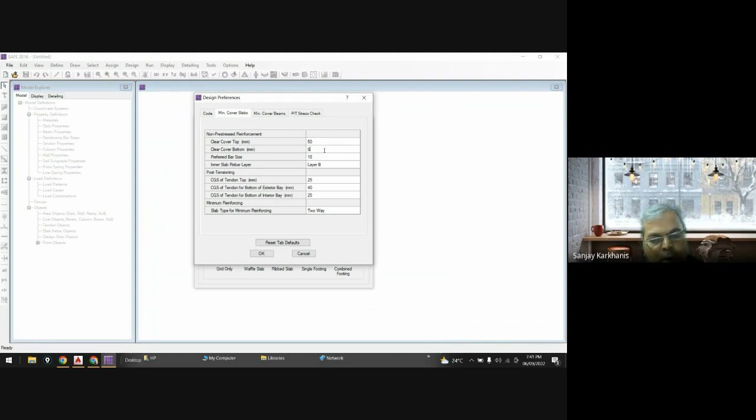Then design preferences. Then minimum cover. Now again it is for footing, so I am going for 25. No, not 25, it's 50. So 50. Then bottom cover also 50, top cover also 50. Then we are going to use the bars as 12 dia, and rest of the things are okay. Clear? Yes, sir.

Now, last time we have drawn everything from basic, but today we'll take help of this combined footing template. Click on that combined footing, and now you will get this. You have to provide this data. Now, whenever you are going for combined footing, let me discuss some points about when you will be going for combined footing. Yes, any idea?

Hello. When the distance between two foundations is very close, we use combined footing. When the distance between two columns is small and you go for design of isolated footing, you might get interference of one footing into the other, or they may be close to each other, and that's why the pressure bulb may get disturbed. So instead of going for two isolated footings, we may go for combined footing.

So the footing will be one, and from one footing there will be two columns. There could be two columns, three columns, anything. Sometimes it may be four columns also. For four columns, if they are very near to each other, we can provide a combined footing. That is the first case.

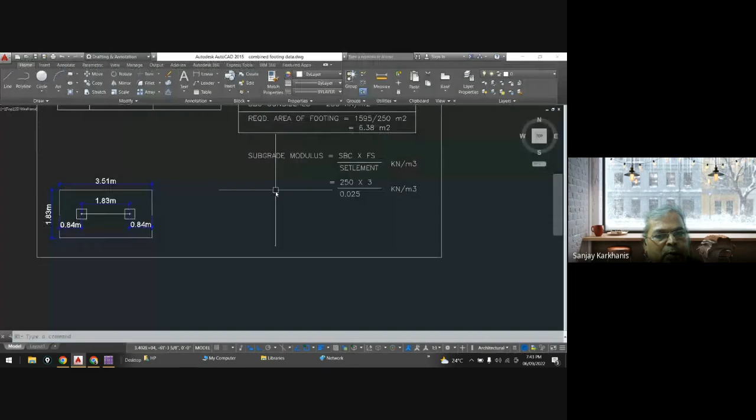So let us see one diagram. I have prepared one diagram. See, this is our criteria. I have done a little bit of work on it, and you can take a snapshot of this so that it will be available to you, or I may provide it, or you can create your own also. What I'm considering: column A is this, column B is this right side column. Both columns have a size of 15 by 15, that means 0.38 by 0.38.

Hello, am I audible? Yes, sir.

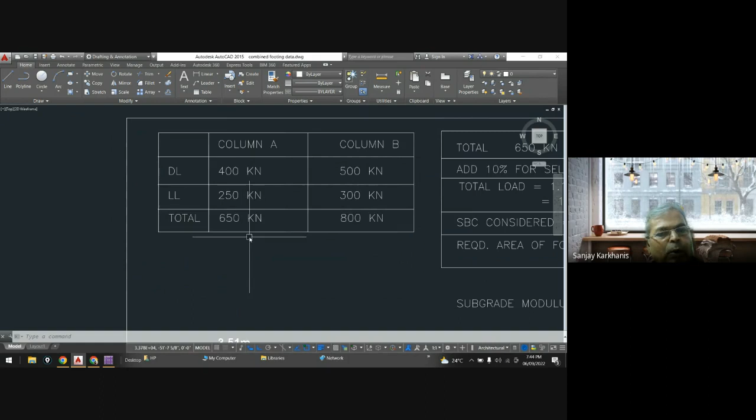Then on column A, we have a total dead load of 400 kilonewton and a total live load of 250. So together on column A we have 650 kilonewton as working load. On column B we have, say, 500 and 300, so together it is 800. Now, if you design isolated footings, you may see that the distance between the two footings is very less, so we have decided to go for this.

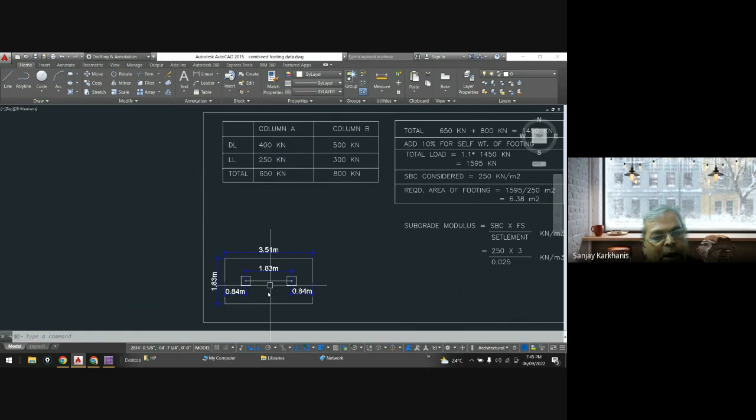Another thing is that the bearing capacity is less. As per our consultant, the soil bearing capacity to consider is only 250 kilonewton per square meter. So low bearing capacity soil is available there, and that's why you will get a large footing. Isolated footings might interfere with each other, and that's why we are going for this.

Now, basic work is carried out. Total load is 650 plus 800, which is 1450. We are adding 10% for self weight, and so the total load on the footing comes out to be 1595 kilonewton. The SBC is low, so the required area of footing will be 1595 divided by 250, which comes out to be 6.38. So 6.38 square meter area for two columns.

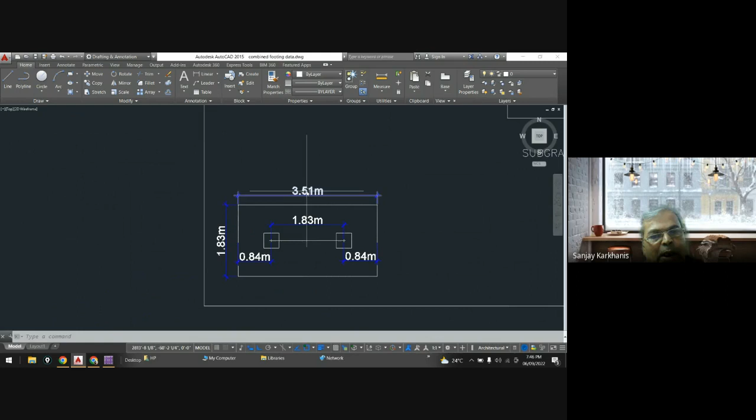So the combined footing is this. We are assuming 1.83 as width, and based on that width we are calculating 3.51. If you multiply 3.51 by 1.83, you will see that the area of footing is more than 6.38. Then subgrade modulus is also calculated here, which is nothing but SBC multiplied by factor of safety, FOS, divided by settlement.

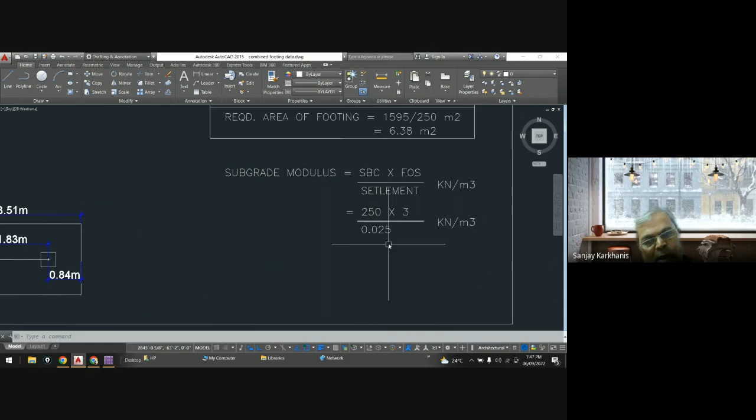Now the settlement: as this is in kilonewton per square meter, this has to be in meters. So allowable settlement of 25 mm has been converted. So 250 multiplied by 3 divided by 0.025. How much will it come out? Yes, anybody?

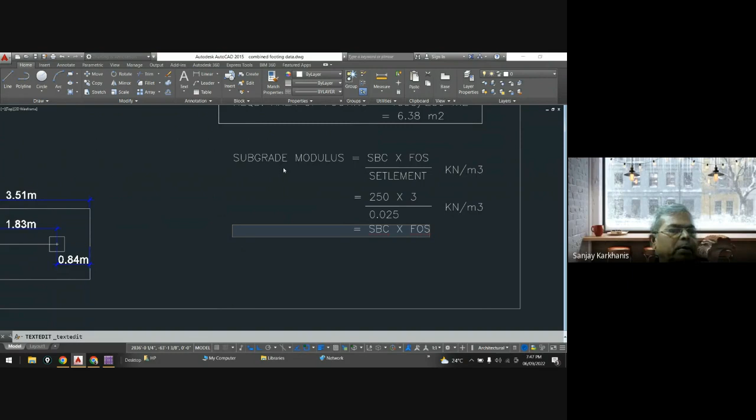Yes, how much is it? 30,000. Yes, sir. Let me calculate it: 250 multiplied by 3 divided by 0.025 is 30,000. So it is coming out to be 30,000 kilonewton per cubic meter, not per square meter. So always see that subgrade modulus is 30,000 kilonewton per cubic meter.

Okay, so this is the data that we have defined.

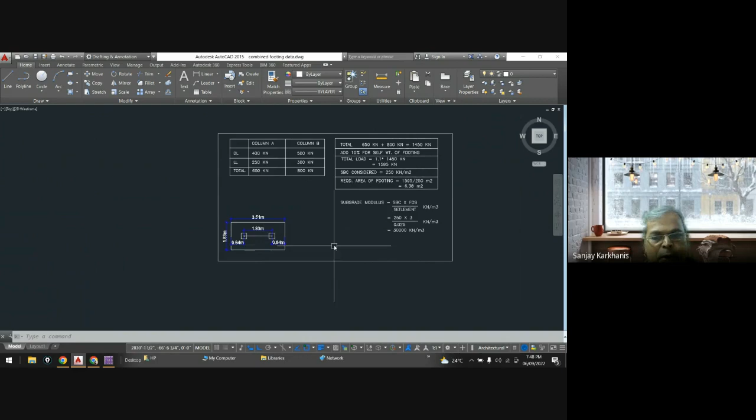This much is the preliminary data that you have to find out, so that your iterations will be less. Otherwise you can consider any dimension and go on rectifying the sizing as per that criteria. But if you work this out, you will see that the iterations are less. So now you can see here.

The architectural data shows that the columns are 1.83 meters center to center. The left edge of the footing is at 0.84 meter, and the right edge of the footing is also 0.84 meter from the right column, and the total dimension is 3.51 by 1.83. Now this is the data that you have to provide. So what is the left distance in x direction?

How much it is? 0.84, right? See here, plan dimensions along x direction, left edge distance. So I'm writing it in meters, so 0.84. Then right edge distance is also 0.84.

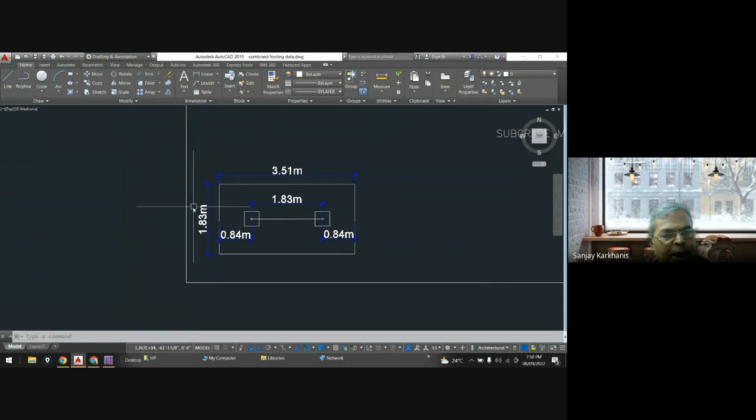And in y direction, now what is happening in y direction? Now you can see that from center, you will see that 1.83, half of that. So 1.83, you may consider this as 1.84, so that it will be more easy. So 1.84 divided by 2 will come out to be 92. So in y direction, upward 92, downward 92, right? Yes, sir. So you can see that here you will provide it as 0.92 in top edge distance. Bottom edge distance will also be 0.92.

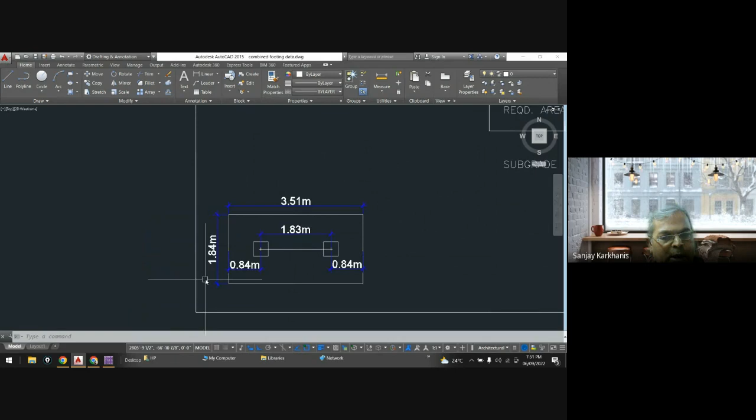Okay. Now the load spacing and sizes. Now here you have to see the geometry. So if you see that along x direction you are having 3.51, and along y direction you are having 1.84, 1.83, because your structure is like this. Let us see. It might be something like this. See, if your orientation is something like this, then accordingly x direction will be 1.84, and bottom distance will be 0.84, top distance will be 0.84, and the footing will be like this.

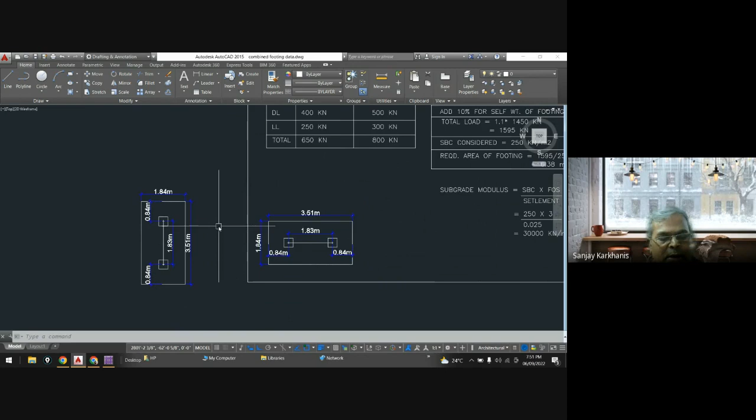So it is as per your architectural data. Okay, so right now we are considering this, and that's why here we'll see that 3.51. So center spacing in x direction is 1.83, and x dimension is 351, y dimension is 184. So you can check it here. Now, load and spacing either in x direction or in y direction. So right now we are considering it in x direction.

So spacing between the two columns is how much it is? 1.83. 1.83, right? Hello. Yes, sir. So here it will be 1.83, and the size of the column. So size of the column that we are considering as 380. So I'm considering it in mm. So I will write it as 380. Okay. Clear? This much data, how we will be entering it, I think it is clear, because there is nothing new or very difficult. So can we go ahead now about load values?

So load 1 and load 2. So this is your column A. You may consider column 1, column 2. So 400 and 250 is the dead load and live load, and 500 and 300 is the dead load and live load on column number 2. So how much is the load over here? In dead load condition, it is 400, and what is the live load? It is 250. Right? Then if Mx and My are there, you can provide that.

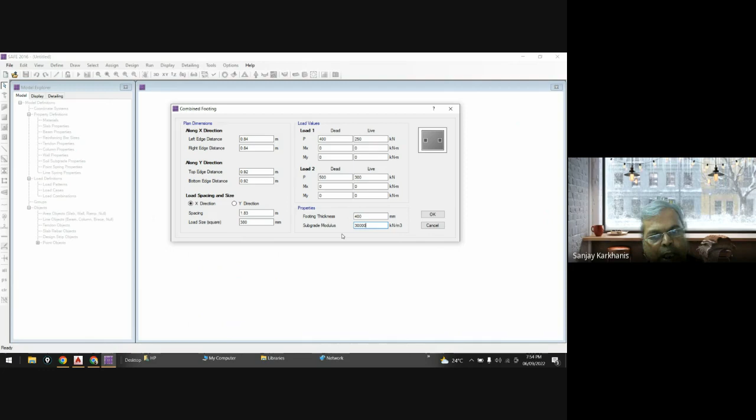And subgrade modulus. What was subgrade modulus that we have calculated? 30,000. Clear? Yes, sir. So click OK, and it will provide you the data. See here, already it has done all the things. So you don't have to mark the footing, mark the column, etc. So that is how you can use the templates. Now here, as this default template has material properties different, we have to go and check it. So let us define the material properties first.

So right now, if you right click on this, you will see assignments, geometry, loads, and design. You can see here some different things which we are not interested in. So we'll define that. Go to define, go to material. Under material, first you will go for add new material. Let us consider grade of concrete as M25, or shall I go for M20? Let us go for M25. So the material name, you can say concrete, CONC M25.

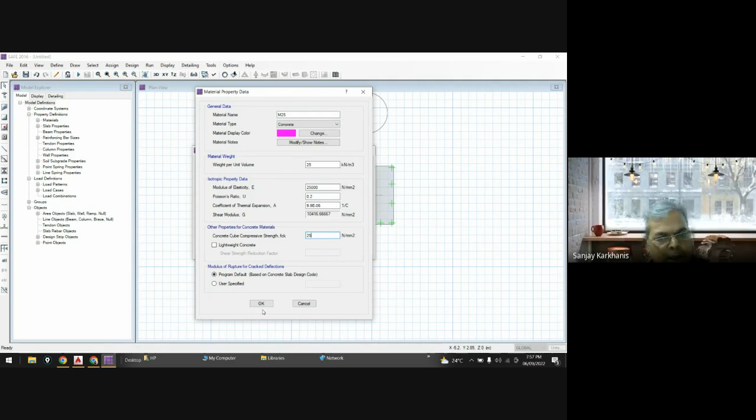So you can see multiplied by FCK. So FCK is 25, and raised to 0.5, and enter. Or you can directly calculate and provide it over there. And then what is FCK? That FCK, now we are going for 25. Clear?

So the material has been defined. Similarly, we have to define another material that is for rebar. So let's say Fe or HYSD, whatever you want to say. And now I want to use Fe 500. So I will go for rebar, and this will be 78.5 approximately, or you can say 75. Then modulus of elasticity for steel is 2 into 10 raised to 5, so 200,000.

Okay, then Fy will be 500, and this Fu, 485. No, that is for 415. For this, it is 545. But actually, it is not used. You can provide 500 also, because we are not using this minimum tensile stress in any calculation. Okay. So this way, we have defined material.

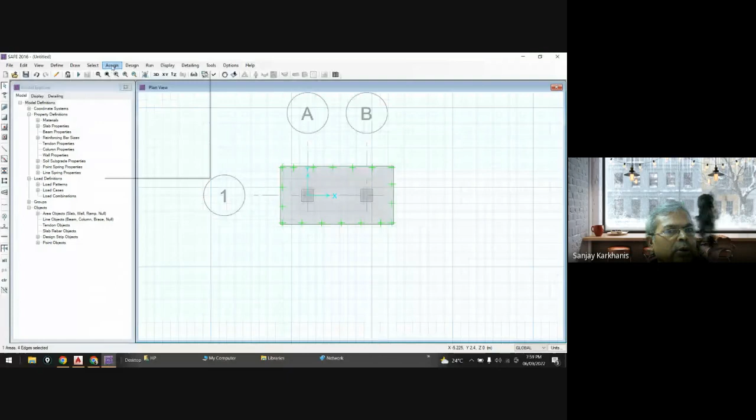Similarly, we have to define what we will have to define. No, the material, only material that we have to define. And now you can select and assign support data, soil properties. So the soil property, okay, we will have to define the soil property also. But yeah, he has considered load combination. Okay, but let me go for that first.

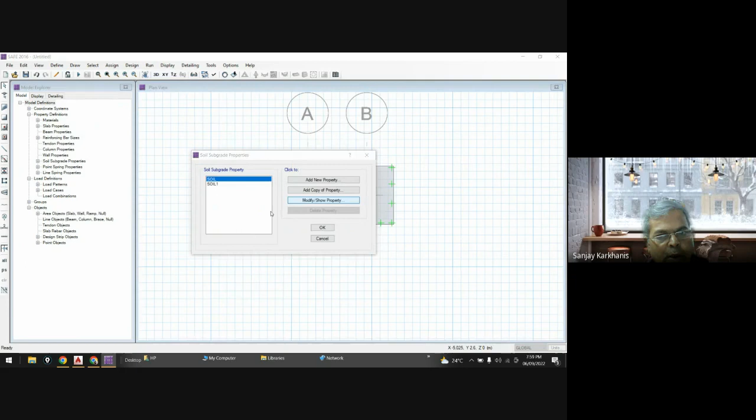If I go for this, soil property is soil, and let me see what is the property that he has considered for soil. So where it is, that soil subgrade properties, soil, yeah, see here, so the soil has been already assigned, and that property has been assigned, so you can go ahead straight away. So after that, we will have to see the design preferences also. So yes, design preferences are clear. This is also clear. So it has been assigned.

So we'll go for load pattern. Load pattern is also there. Load combination. So in load combination, you will add new load combination. So combination one will consist of dead load and live load with factor equal to 1, and service normal will be highlighted.

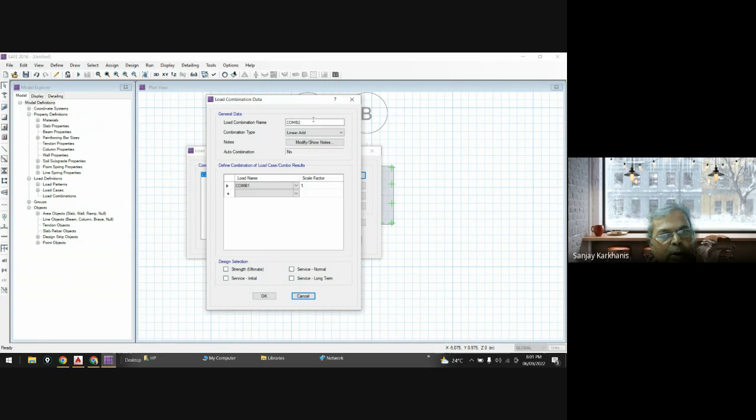Then another combination will be combination 2, where you will have dead load equal to 1.5 and live load equal to 1.5. Okay. And consider strength. Click OK. Okay, the combinations have also been defined. Then what else is required?

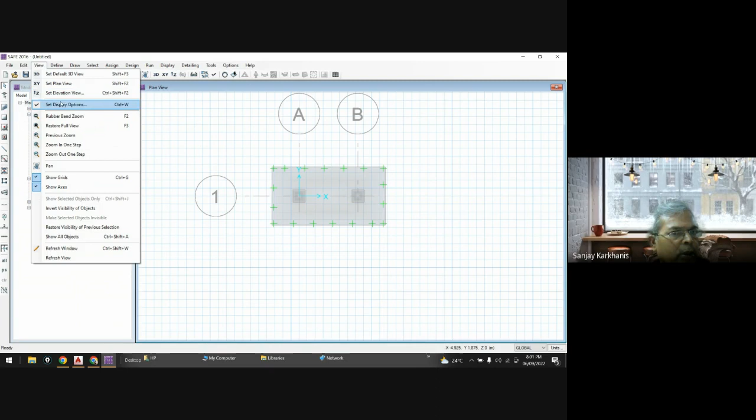You can see the design strips also. So you can check the design strips. Actually already there are design strips. If I go for view, then set display options and design strips, design strip objects. This will be shown. Actually, it's not showing. That means it is not there. Okay. Let me see. Go to design strips.

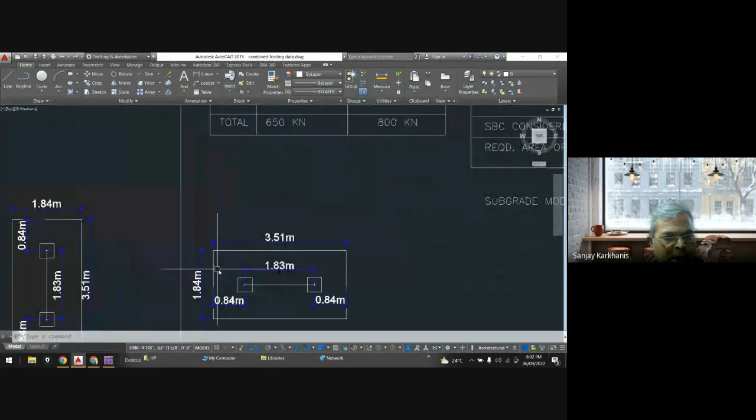Draw design strips, and here you can draw a design strip from this point to this point. And how much is the width? We are considering the width as 1.8. So you can go for 0.9. So the design strip I will go for 0.9, 0.9, 0.9, 0.9 and 0.9. Then okay, and you can start drawing it from this point to this point.

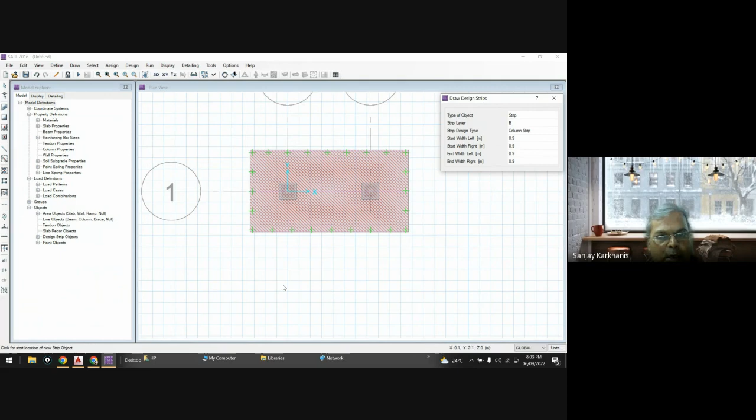And you can draw another for column B. So B will be in this line. So you can draw it from this point to under one column, and then there will be another under another column. Okay, so now I will uncheck that show width. Okay, you can see that actually the strips are already there, but we have drawn now. Okay.

Hello, are you getting it? Yes, sir.

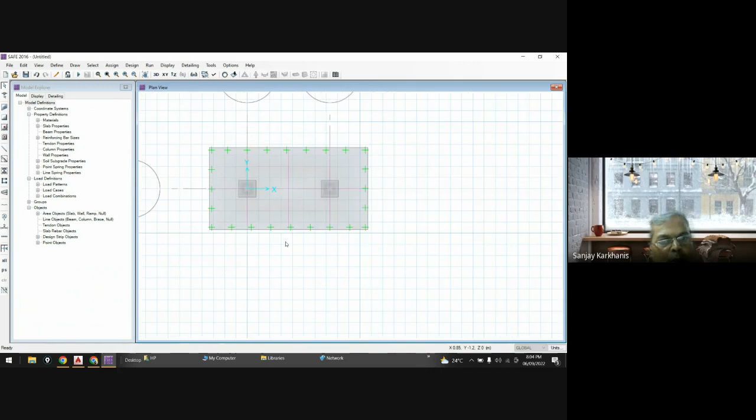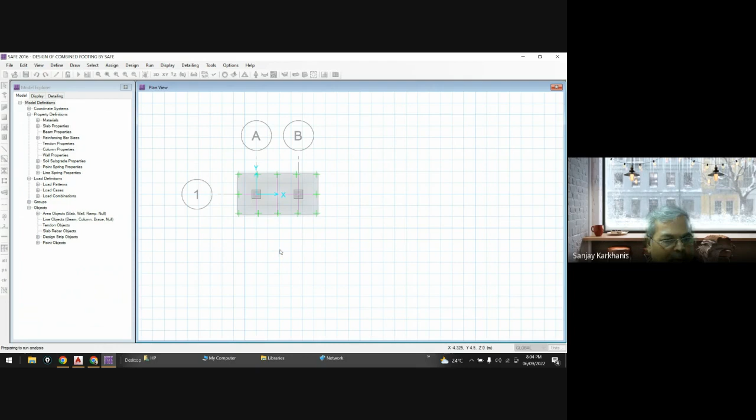Now you can see the strips are drawn, and now the thing is that you have to run analysis and design. But okay, we'll see that first. Now he will ask you for that. So I will design a combined footing. We'll use that. Okay. So I have saved it. And you can see the maximum over here.

And the first thing is that you have to go for display, show deformed shape. Under show deformed shape, load combination, combination 1, apply and close. And now you can see, though the allowable deflection is up to 25 mm, we are just getting 9 mm deflection or settlement below the columns. So you can check it over here. So max is 9.

So if I go for this, 8.77, or you can say 9. So it is definitely allowable. So we do not have any problem with settlement. Now let us check whether the SBC has exceeded or not. So go to show reaction forces, and under that soil pressure, then load combination will be combination 1, apply and close. And now you can see here.

So if you are getting over here, you are getting 266 or something. And what is our allowable? 250. So it is exceeding. So what we can do? Yes, anybody? Decrease the depth of footing.

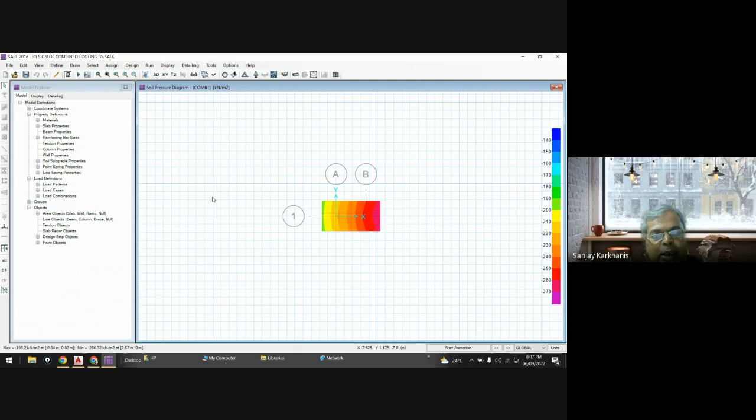No. See, when you are getting allowable soil pressure exceeded, you have to increase the area of footing and not depth of footing. Depth of footing will be increased in case where it is exceeding the punching shear. Okay, so you have to increase the size of footing. Either you have to increase the length of footing, or the width of footing, or both. But unless and until you increase the area, the pressure applied by the soil will not be less than your allowable SBC. Clear?

Yes, sir. So now what you can do? Either you can increase on this side or on this side. Let us consider one by one. In isolated footing, we expanded the footing on both sides. But here we'll do another thing, so you will understand another process also. Let us say I will increase the length of footing only, not the width, so that it will have a larger area, and I will increase the length on the column which is heavier. So the entire length will be increased on the right side. Are you getting?

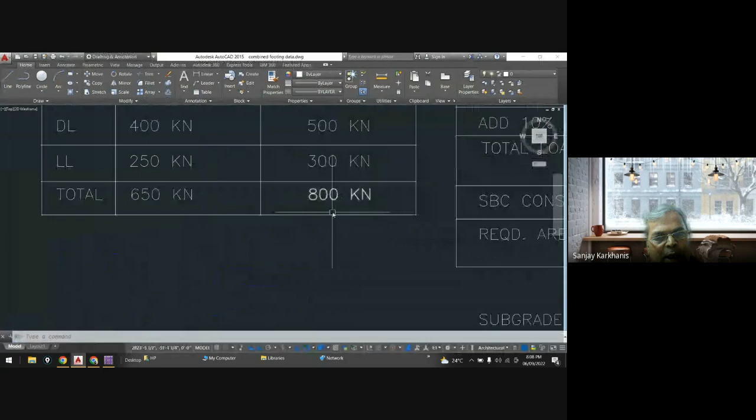See here, we are having a total load of 800 on the right side footing and 650 on the left side footing. So there is no point in increasing the length on the left side footing. So I will increase on the right side. Of course, you can increase whatever you want. Accordingly, your reinforcement will be calculated later on. So how can we increase?

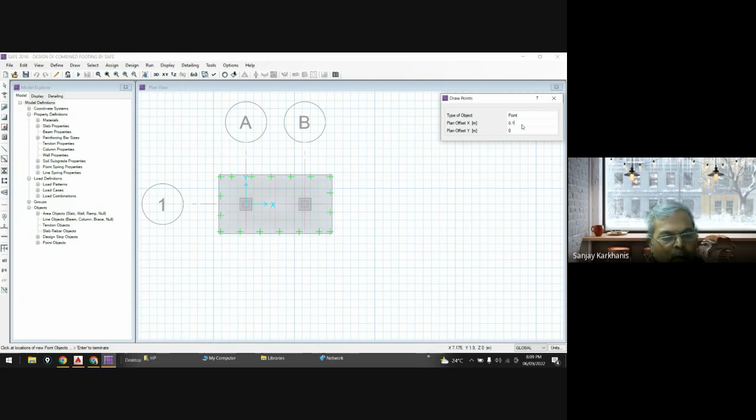I want to move this line to the right side, so I must have a point. So I will go to draw, draw points. Click on draw points, and let's say I want to increase by 150 mm. The dimension is in m, so I will increase it by 0.15. So I will have a point on this side and on this side. Clear? Now I will edit this footing area.

First I go to selection and select the footing. After selection, you can see one area and four edges are selected. Then I go to edit, and in edit, see edit areas. Expand and shrink will expand in both sides. Here you can see edit design, edit rebar, replicate grid data. It must be in edit, move points, lines, areas. This is not the offset. Edit areas: divide, expand, split areas, modify.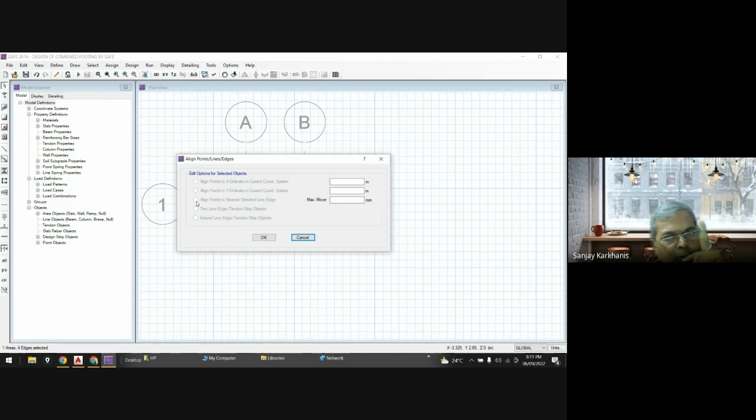Expand, shrink area. This will expand on both sides, I don't want that. Move point, line, areas. Align, it's not align either. Edit, grid data. Excuse me, sir, I think you can use the stretching command below the selection, on the left side.

I'm not using this, but you can go to load definition, property definition. Display, it's not that model. It has to be somewhere here in edit areas. Replicate. One minute. Sir, from the icons you can use, below that, reshape. Yes, reshape. This is the reshape object. Click on that.

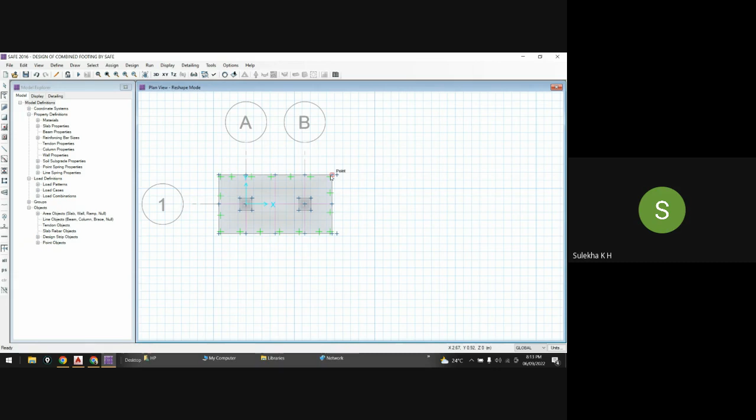Sir, you can select the slab, the foundation, then from that corner you can stretch to the required point. Yeah, that is the process, like this. Yes, it's a reshape command, not edit, but in edit also you must get that reshape command. Actually, I don't use these pointers; I go by the file menu only. Anyway, this way you have increased it. Now again, you have to select this design strip, go to reshape, and reshape it.

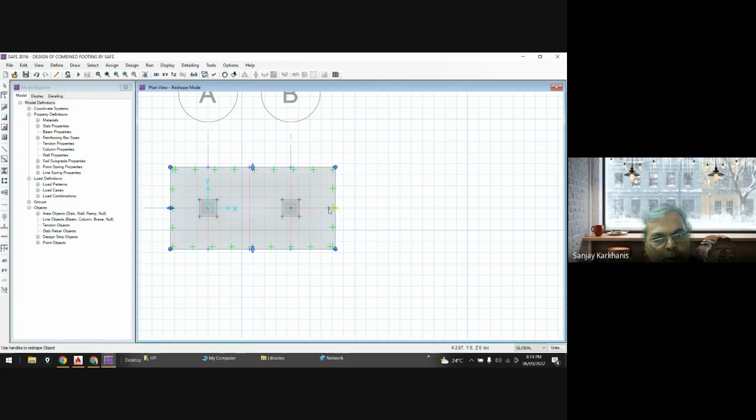Select. Let me select this design strip. One area and 4 edges are selected. It's not selecting the design strip. Yeah, now it has selected design strip and reshape, and from this point to this point. Okay, now we'll see that again.

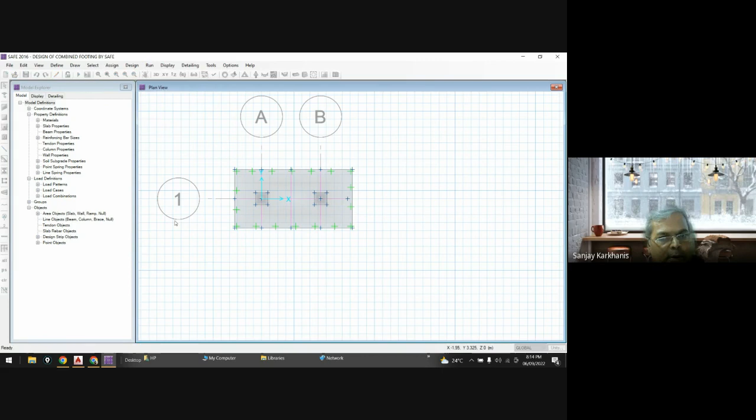Okay, now after that, again you will go for run analysis, and then we'll straight away go for show reaction forces, soil, subgrade, combination 1, apply and close. Now you can see it is 234. Okay.

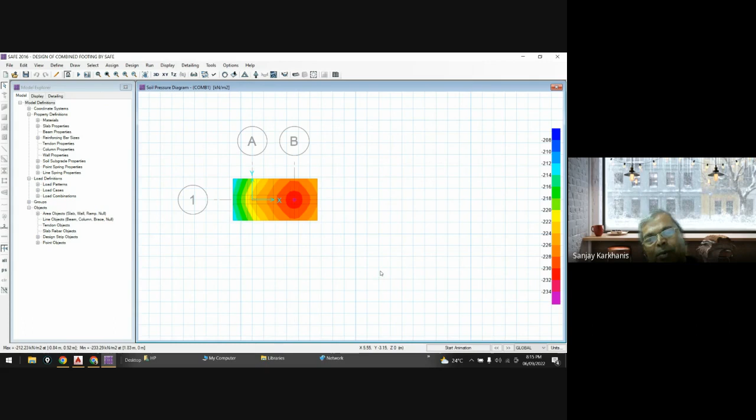Now you must have understood why I went for only 0.15, because actually we are having SBC something around 250, and the soil pressure on the previous area was coming out just above 250. It was not much. So based on that, you can decide, and you can start with trial and error also. You can start with 0.1, then increase by 0.1, or immediately go for 0.2 or 0.3, and find out the total area.

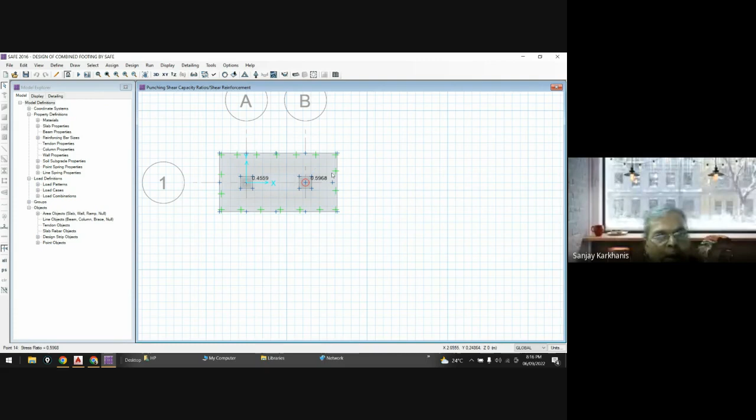Okay, now the actual soil pressure is less than allowable bearing capacity, so it is okay. Our footing area is sufficient enough. Now we'll see the punching shear. You can see here you are having a punching shear equal to 0.45, and here you are having a punching shear around 0.59.

Now you can go and check. You may go for 0.8 to 0.9. So that means we are having a punching shear well below our allowable ratio. So we may increase this 0.59 by reducing the depth of footing. For depth of footing, you have to go to define, then slab properties. Under slab, go to modify, and here you can see 400. Now this 400, you may go for 375 and check whether it is okay.

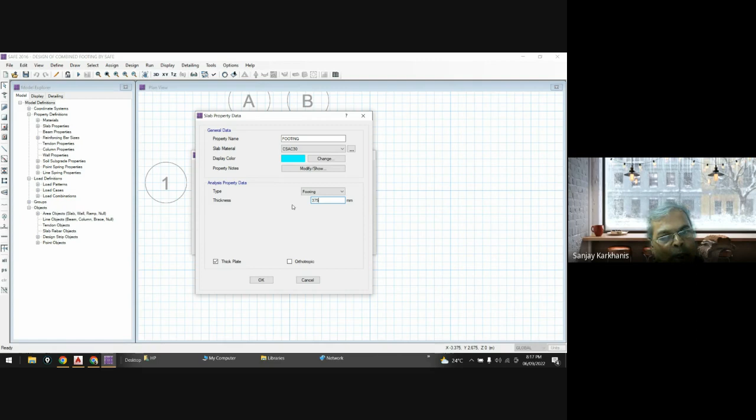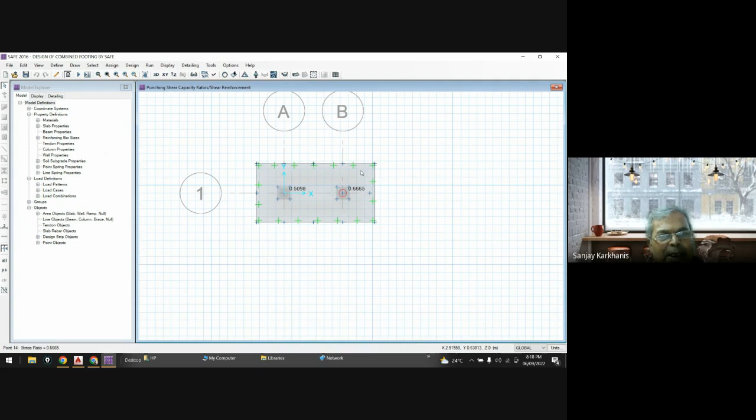Okay, then similarly step also you have to change. Step is also 400, so you have to make it 375. Then you can run analysis and see the punching shear: 0.5, 0.66. So still you can go below, but this is enough because 0.66. Now if you go for 350, it might reach something around 0.9, or you may do it and check it. No problem. Let us see that.

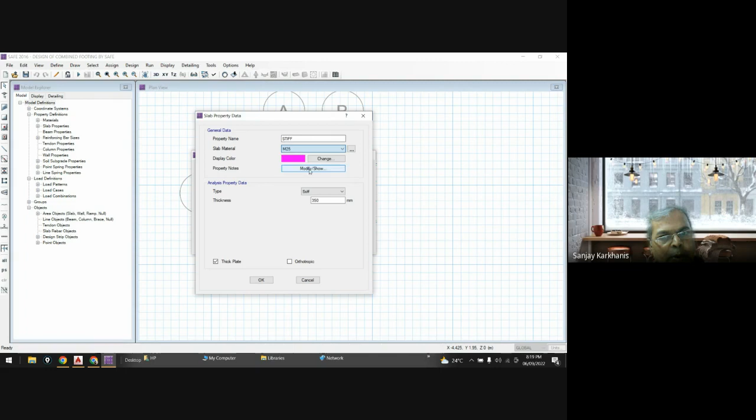So again, we'll go to define slab properties, then modify, and here 375. So we can go for 300. No, 300 will not be enough. And again here the property is not considered. So step here also you have to go for 350, and change the property to M25. Okay. Then run analysis.

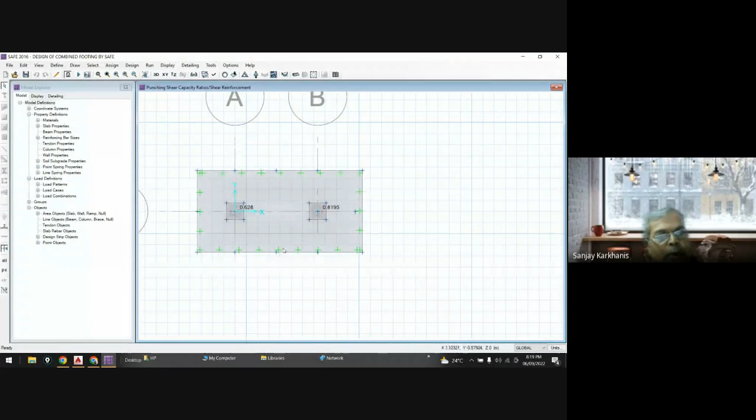And display, show punching shear. See here, now it is 0.81, so that is more than enough, because if you still go on reducing, it might cross 0.9. So for this column you are getting 0.81, economical, and you cannot change the depth only for this footing, because the combined footing will have one thickness only. So finally our size is sufficient, and it is passing punching shear calculations.

Then assign, clear display of assign, and we'll see the design now. Go and see the slab design. Show slab design. Under this slab you have already defined the strips. So we are going for layer A. Then show top and bottom bars. Then go for none first. Then fill diagram. Then show rebar intensity per unit width. It will give you how much area of reinforcement is required in 1 meter. Apply and close, and you can see.

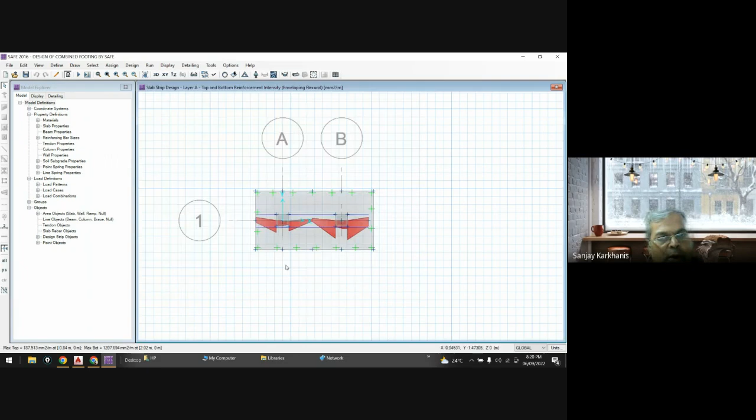So you can check it over here. What is it for this footing? You're getting a bottom reinforcement 331, and here you are getting 1193, and here 332. You can check the minimum and maximum over here. So how much is it? 331, and here 411, and this is bottom reinforcement 1193. So 1193 in 1 meter.

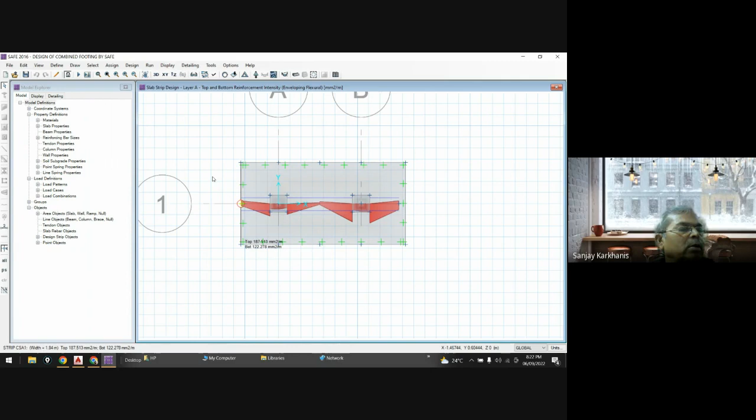So if you are giving 12 dia bars, 1193 divided by 113, you need 10.5. So 11 bars you need, and that is in 1 meter divided by 11 bars. So you are getting 12 dia bars at 90 mm. So you may go for 16 dia bar. Let's see, 1195 divided by 201.

1195 divided by 201, that is 5.9, so 6 bars. So in 1 meter, if you are providing 6 bars, then you need 150 as a spacing. So 166 is that, but we'll provide 150. So 16 dia bars at 150.

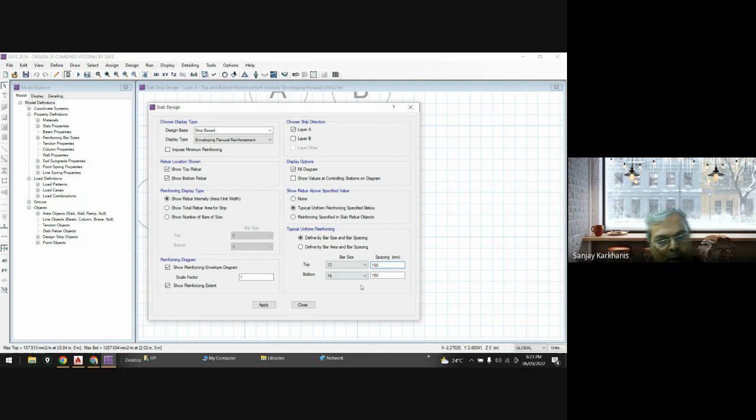So if you go to show slab design, now we'll consider this typical. The top reinforcement we might go for 12 dia, and bottom reinforcement we are going for 16 dia, right? And the spacing we are providing is 150, and let us provide here also 150. Okay, and check. Now you can see you don't need any reinforcement at top and bottom. That means whatever reinforcement you have provided is sufficient.

Yes. So this is for bars in the X direction. Now for bars in Y direction, again you have to go to display, show strip forces, and then display, show slab design, then click on B, then first click over here none, rebar, and apply and close.

Now you can see the reinforcement is required below this and below this, and minimum is required over here. That is always the case, but for simplicity we are providing the reinforcement based on the heavier column. So here we are getting the reinforcement something around 1179, right?

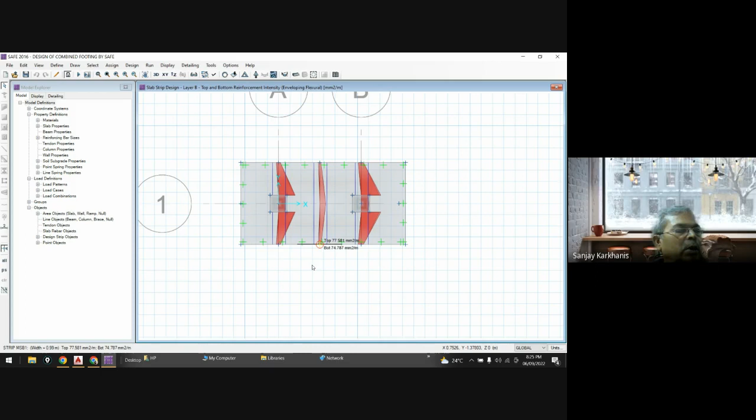So if we are providing 1179, then 1179 divided by 201 will give you 5.8, means 6 bars. So 1000 divided by 6 bars will give again 166. So you need 150. And top reinforcement, you can see you don't need at all. It is very little top reinforcement that you need. So you can provide 10 dia at 150.

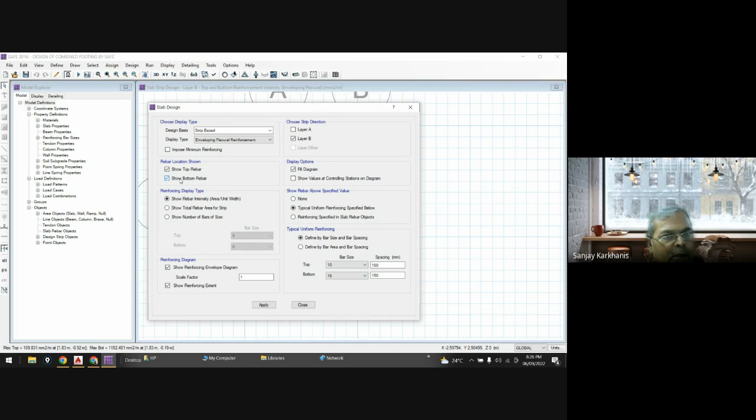So go to display, show slab design, and in layer B, now this. So here I will go for 10 dia, and here 16 dia with 150, and show bottom bar, show top bar, and apply and close. And now you can see you don't need any reinforcement, right? Yes. So this is how you can develop your combined footing.

You can design combined footing in SAFE as per your calculation. The only thing is, again we are coming to the basics, some initial working has to be done with the help of your results to find these dimensions, or you may go for trial and error. Without calculation you may start, then in the first run you will see that your settlement is getting exceeded, or when settlement is not exceeded, your soil pressure is getting exceeded, whatever your bearing capacity. So you will have to increase the size of the footing.

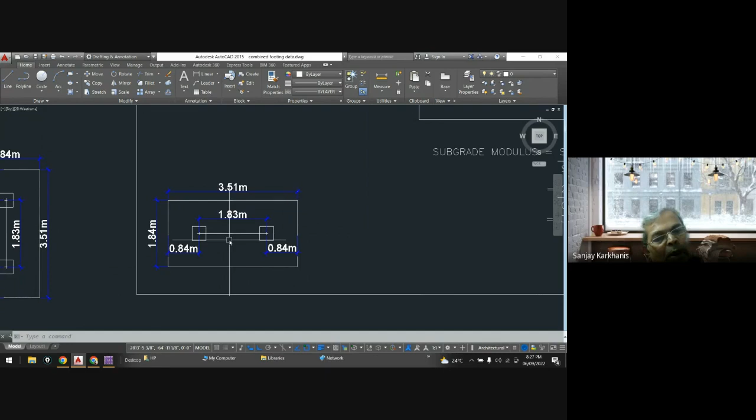And finally, if you go for any lesser depth, punching shear failure will be there. So first the settlement check, then bearing pressure check, and two-way shear or punching shear check. After a satisfactory result of all these three, you can add design strips and go for reinforcement design, and see the slab design for strips parallel to the X direction and parallel to the Y direction, and accordingly provide the reinforcement.

Yes, any query? Sir, which reinforcement will we give at the bottommost? At the bottommost, I have not understood. See, let me draw and show you that concept.

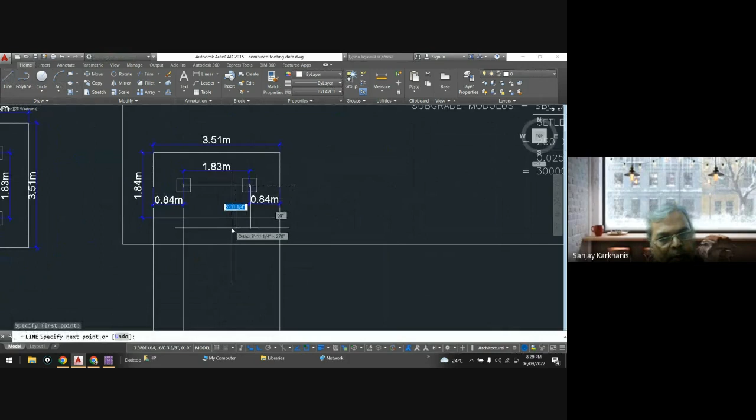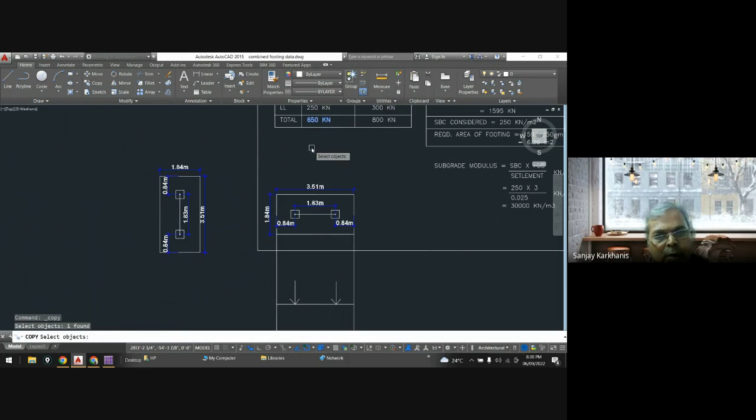See, this is your first point of application of concentrated force, and this may be your second. Here you are applying the effect. See, these are your forces. If you check it, the total force is 650, and then this is 800.

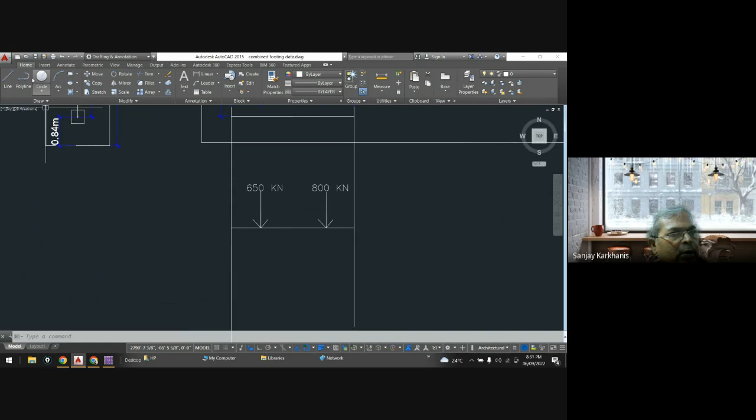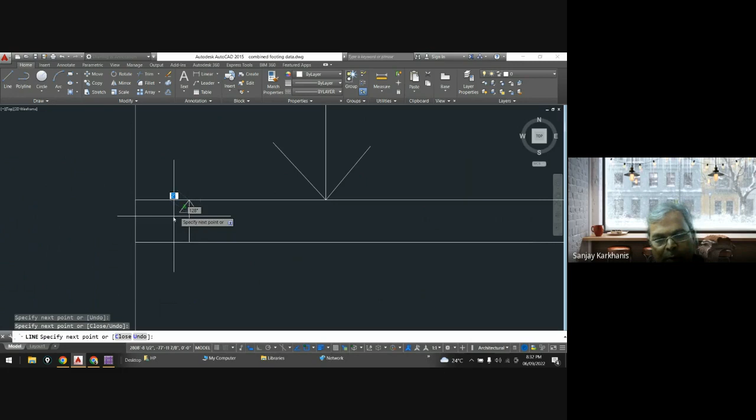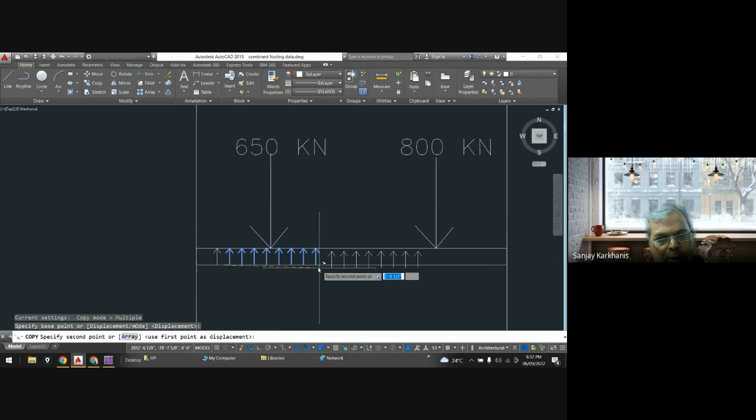This is the condition of your foundation, and you're having upward soil pressure, something like this. I'm not able to draw it, but you can see upward soil pressure is over here. Let me draw it with a rectangle. So this is your upward soil pressure. So this is your condition, something like this. Now this will give you the idea.

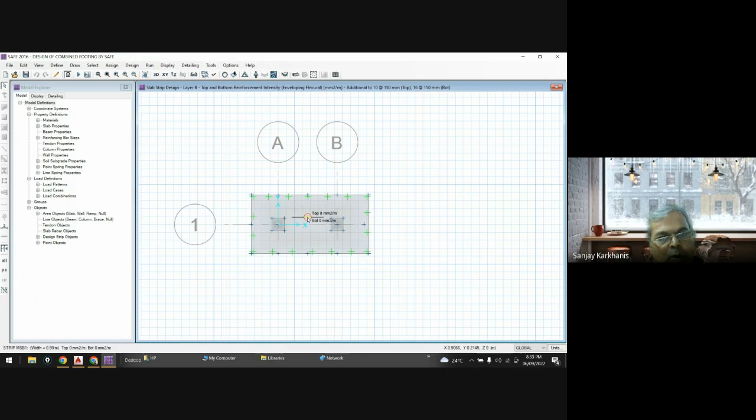See the bottom. If you see your bending moment diagram, this is a cantilever portion, so it will be something like this. That means in this part there will be top reinforcement, and bottom reinforcement there, and the same you are getting over here. So if you see the strip forces: display strip forces, combination 1.5 and layer B. Let me go one by one. So strip forces.

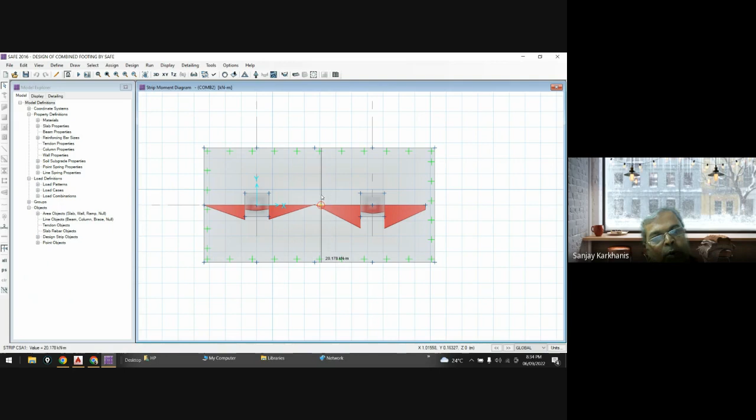You can see that here a bottom reinforcement is required because the bending moment is drawn on the tension side. So the bottom reinforcement is more in this part. So this entire part has bottom reinforcement, and you don't have any top reinforcement because you don't get a hogging moment in the bending moment diagram, because the distance between the two columns is a little bit on the higher side.

So are you getting it? See, you can consider this as a continuous overhang beam with inverted supports, or you can mirror this and then you will understand it properly. Let me show you that. Where is that mirror?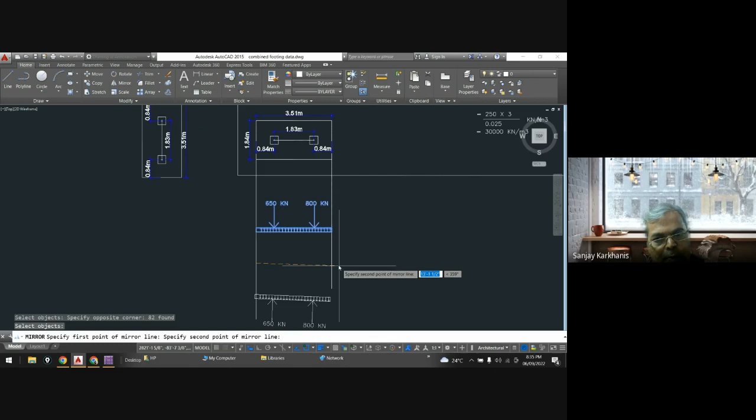See, if you see this, 650 on the left side, 800 on the right side, and if you see the bending moment diagram, you will see that it is something like this. So you are not getting any moment at bottom. The same way here, you will see that you are not getting any moment at top, because it is exactly upward.

So I will say that combined footing is just a mirror concept of a continuous beam with overhang on both sides. So this is your first support, this is your second support, and there is an overhang on the right side and an overhang on the left side. Then you will understand where you have to provide the reinforcement. And similarly, you can get it through the bending moment diagram also.

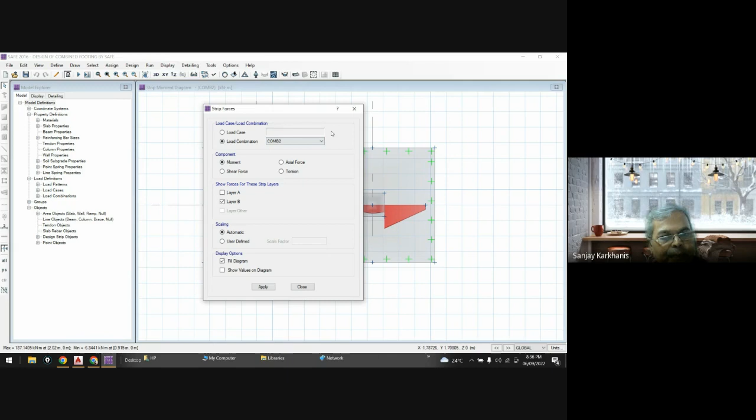So even if you go for B, see in the B case also you are getting a bending moment diagram at bottom only, because in this case this is the point, and there is an overhang on the left side in the upward direction, and an overhang in the lower direction. So the same thing, you can check it.

So sir, in both the layers, layer A and layer B are coming in the bottom. In these two, which one will be the bottommost? Which one will be coming below? Okay. Length one, length two. Yeah, that's right. See here, when you have defined the strips, you have already considered B layer is up and A layer is bottom. So you have to provide reinforcement in A layer at bottom and B layer on the top.

Okay, sir. Actually, that is just a theoretical point. See, basically, even if you provide B layer below and A layer above, there is only a lever arm difference of 16 mm, because you are using 16 dia bar. If you are using 12 dia bar, there will be a difference of 12 mm. So practically, it has no meaning. I don't know why people feel that layer A is supporting layer B. No layer is supporting any other layer. The entire thing works along with concrete. That is the mechanism.

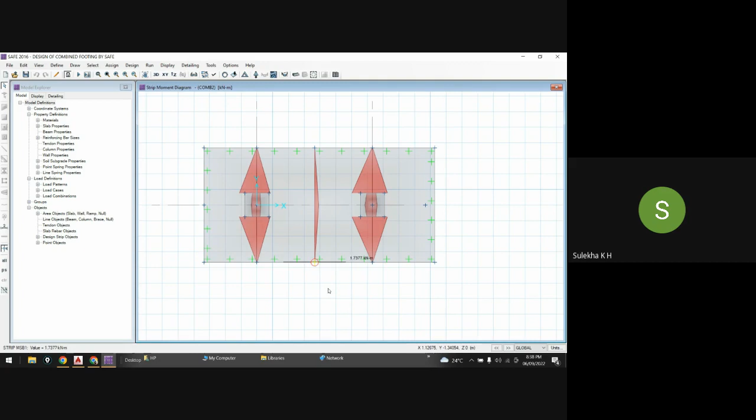Okay, sir. Yeah. So if you are talking in a theoretical way, I will say that A layer has to be at bottom and B layer has to be on top of A. But sometimes you forget, and you do the B layer at bottom and A layer at top. Even then, practically it does not make any difference. Theoretically, you are getting a lever arm lesser by a diameter, because effective depth changes. Yes.

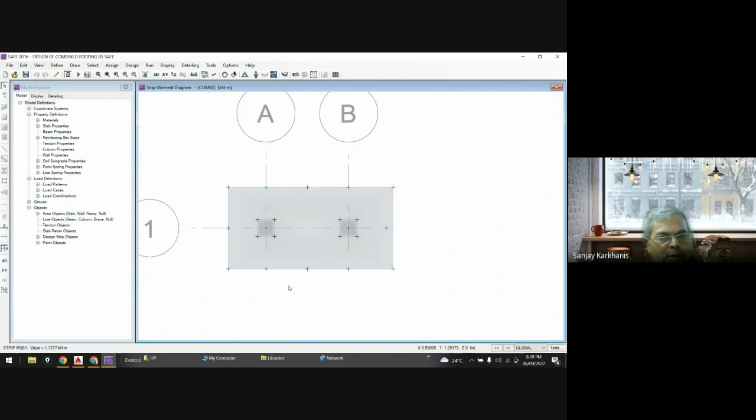Okay, sir. Yeah. Any other query? Hello. No, sir. Okay, then with this, we'll conclude today's session.

And next time, I think we'll go for another combined footing with some zigzag shape. Maybe that is with 3 columns, something like this. Let's say you are having this, something like that. Let's say you are having a column, but otherwise the concept is the same. The only thing is that you have to make some changes.

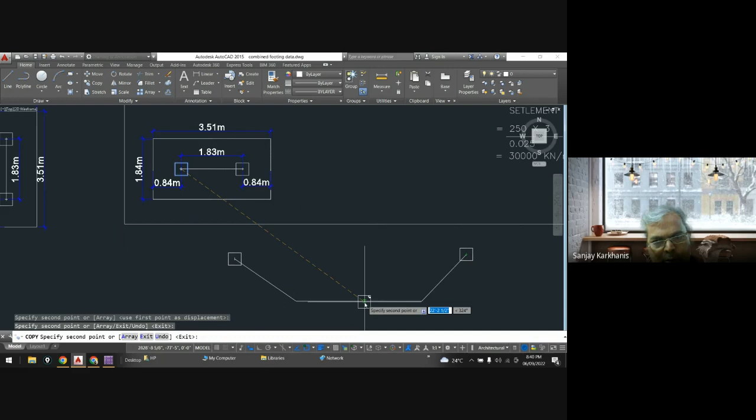Let's say somewhere here you are having three columns, and the center to center distance between the columns is very less. Then you will have to provide a footing something like this. That too you can design in SAFE. Manually designing such combined footings is very problematic because it is cumbersome. But in SAFE, as it is based on finite elements, you can design this type of footing.

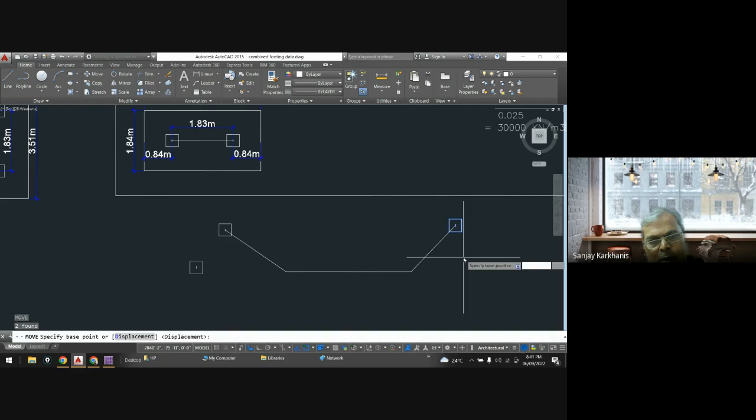Or you may say that one footing is over here, one footing is over here, and another footing. Let's say these are your three columns. Triangular footing, sir? Yeah. So it is not a triangular footing. It will be a footing something like this. Doesn't matter.

Yes, got it. Yes, now, sir.

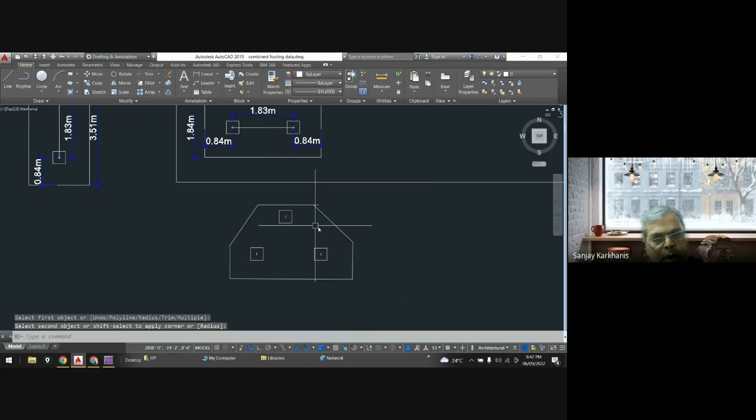So this type of footing, if you want to design manually, it is very, very cumbersome. This type of footing you can design easily in SAFE, and basically I use SAFE most of the time only for design of such complicated footings, because if you go for a combined footing for this also, then this footing gets disturbed. So you have to provide a footing something like this.

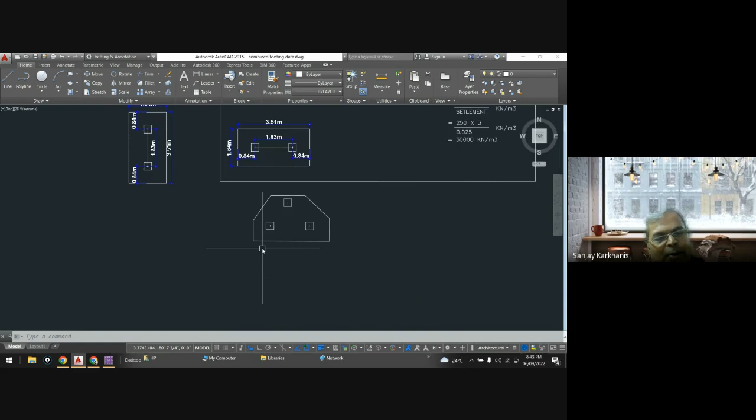Clear? Clear, sir. So shall we go for a footing like this? You can see the concept is the same. You have to find out a rough area of the footing with the help of the loading on this footing and this footing, then you have to chamfer the sizes, and then you can provide this sort of arrangement in ETABS or SAP, analyze it, and based on that you can further revise the shape.

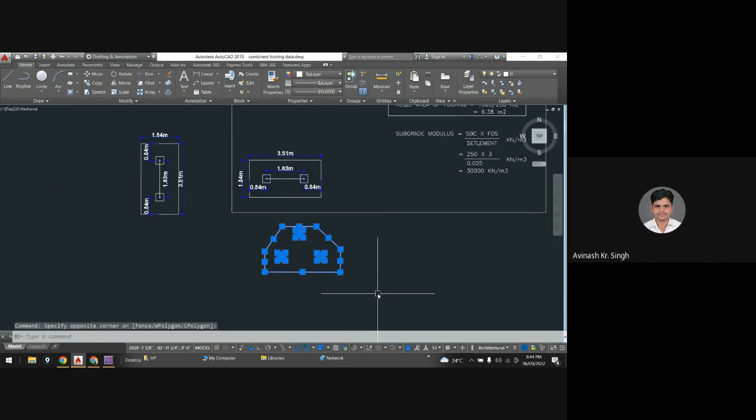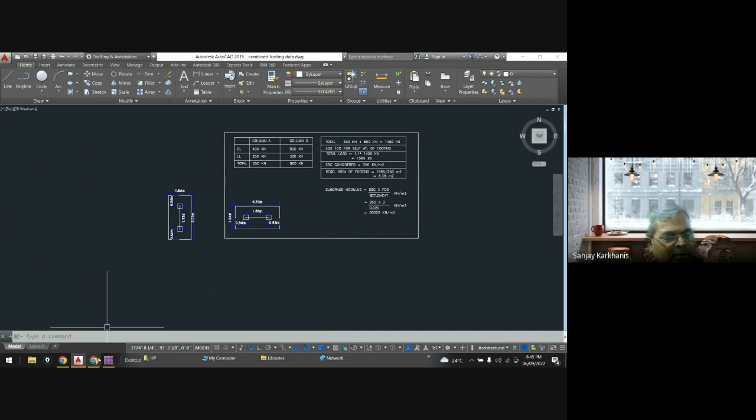Okay then. With this, I will try to get a practical situation and practical forces. Here we are just considering some hypothetical forces and hypothetical dimensions, but I will check in my office, and then we'll go ahead with that information and show how to design that trapezoidal type of footing. Okay. Yes, sir. But the principles are the same. The basics do not change anywhere. The same things will be used, don't worry.

Okay, then with this we'll conclude today's session. I think you people might have enjoyed it a little bit. Go ahead with practice. Any type of hypothetical loading you can assume, start and find out what depth is required, or you can go for a very low bearing capacity, something around 150, and check what depth and what size of footing you need. That will help you develop your confidence.